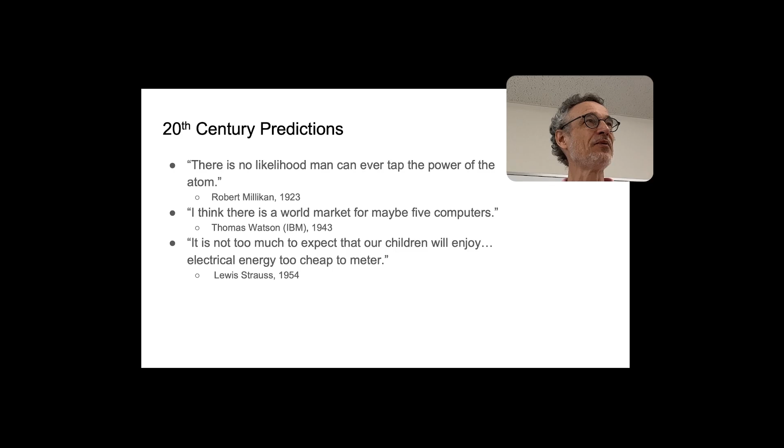So then into the 21st century, this is from 2000, 26 years ago, people were predicting this - the International Energy Agency, who are responsible for looking at international energy, and their predictions.

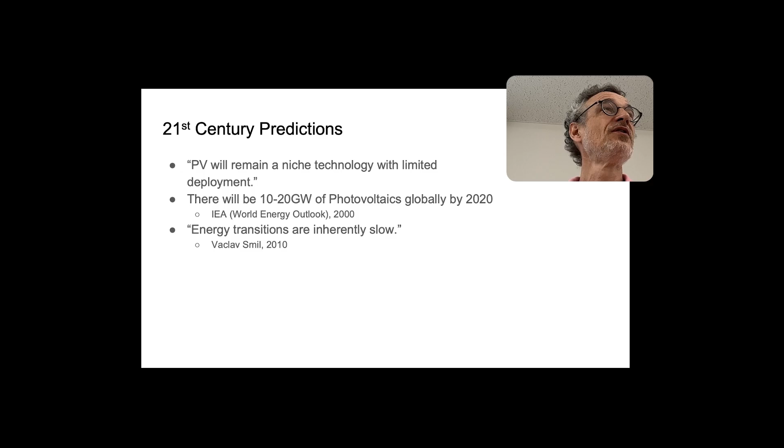They thought that photovoltaics would just be a niche industry, not widely used, and predicted 10 to 20 gigawatts by 2020. There's another more recent quote that energy transitions are inherently slow, which I'm not sure is true - I'm not sure what's slow, how slow is slow and how fast is fast.

Around half is in China. But China also has not half the population of the world - it probably has about half the manufacturing of the world, probably about half of industry is in China.

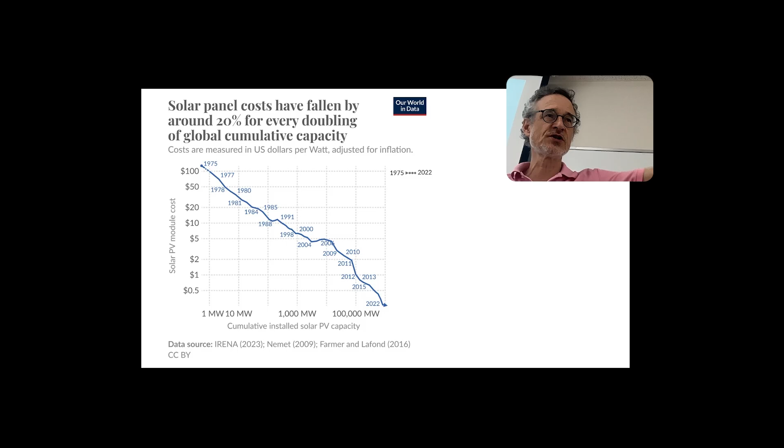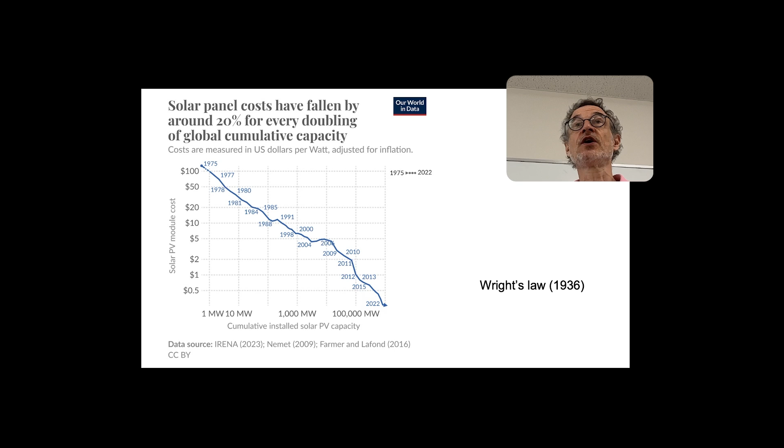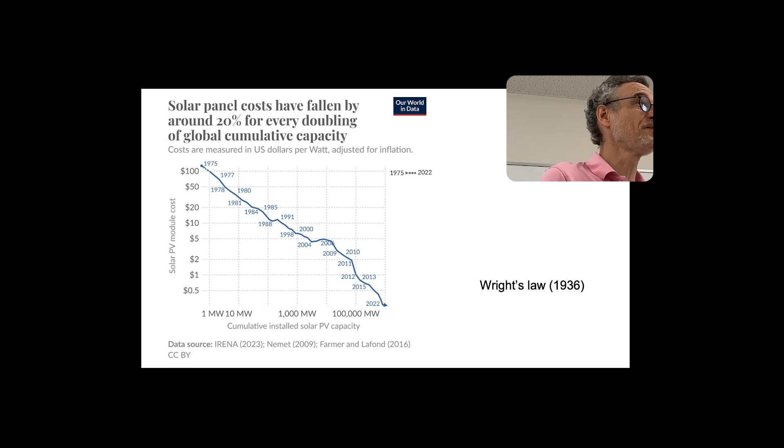The other thing that's happening is this cost. What's been happening at the same time as we're using more photovoltaics, the cost has been going down. There's a fairly steady relationship - as more solar panels are installed, the prices go down. This is called Wright's law, and I think this applies to many different kinds of technology - whether it's computers or solar panels or shirts or pencils, as they produce more, the costs go down, and it goes down in quite a predictable way.

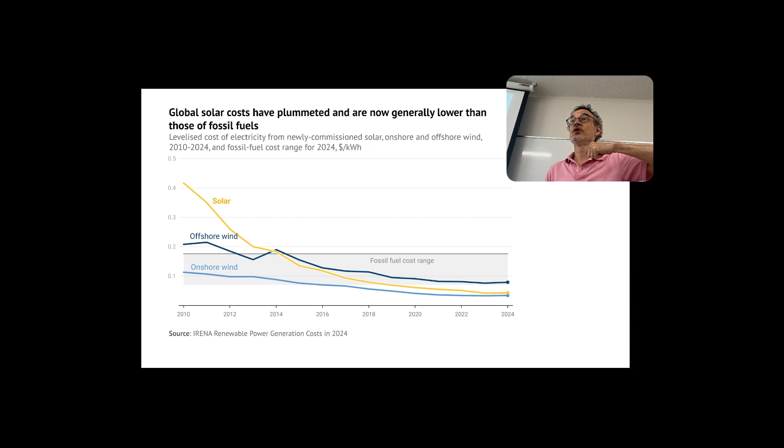What's also happened - this is the cost of solar and wind. There's two kinds of wind power: onshore wind and offshore wind. The advantage with onshore wind is it's close to where the electricity is used - you don't have to go out, the sea can be dangerous, the sea can be quite damaging. But the advantage of the sea is there's more wind, more constant wind, and you can build bigger wind turbines. But in most cases, onshore wind has been cheaper.

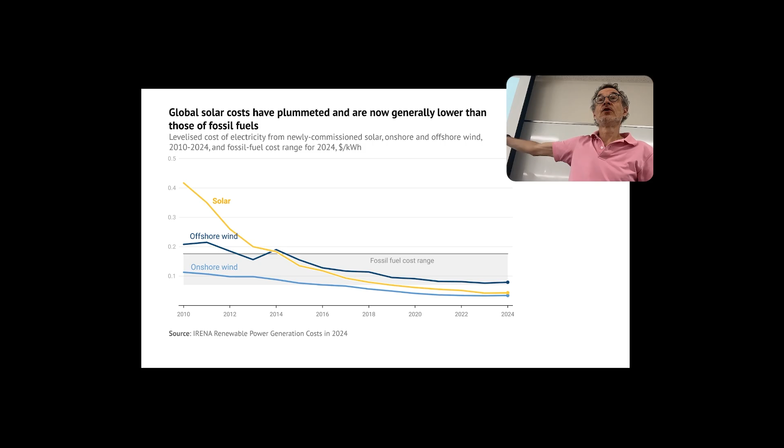This is the range of fossil fuels, which is more or less staying constant - fossil fuels is old technology, it's not really going to get cheaper. Wind and solar are getting cheaper, and now offshore wind is getting to be cheaper than most fossil fuels. Already, solar has been cheaper than fossil fuels, and onshore wind has been cheaper than fossil fuels for quite a long time. Of course, this depends where you are in the world - not everywhere is exactly the same.

The other thing that's happening is the return on investment in oil - the amount of energy you need to put in to extract oil, it's getting more expensive to find the oil. We've found all the easy oil; we need to dig deeper and go further to find more recent oil. Interestingly, some of the oil is underneath ice, so as the world gets warmer, it may become easier to find oil - which is what's making the world get warmer. I don't know whether that's irony.

What's happened as well - since the amount of solar power is increasing every year, we're using energy to make solar panels. For a while, we'd been using more energy to make solar panels than we were getting from them, because production kept increasing. But in the last maybe 10 years, this has flipped - now the amount of energy we're getting from solar power is greater, because manufacturing has got more efficient, cheaper, and uses fewer resources. So now the photovoltaics are a net benefit to the energy grid.

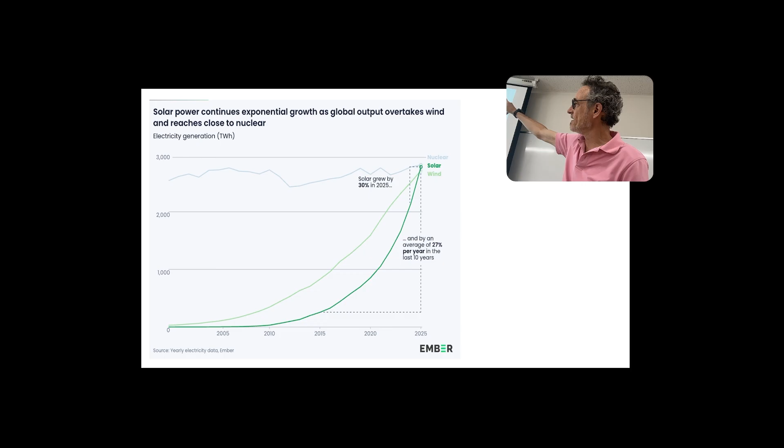This is around 2025. We're now at a very interesting point where we have nuclear, solar, and wind all at about the same level - they're all non-carbon or very low carbon. So as far as climate change, nuclear, solar, and wind are all good news. But we can see nuclear is fairly constant, wind is increasing fairly steadily, and solar is increasing very steeply.

And this is what's been happening in the past. So one thing we can see, there are curves. What tends to happen is technology develops on some kind of curve, and often what's called an S-curve. At the beginning it gradually increases quite slowly, then it starts increasing very quickly, and then it kind of tails off and levels. This is known as an S-curve.

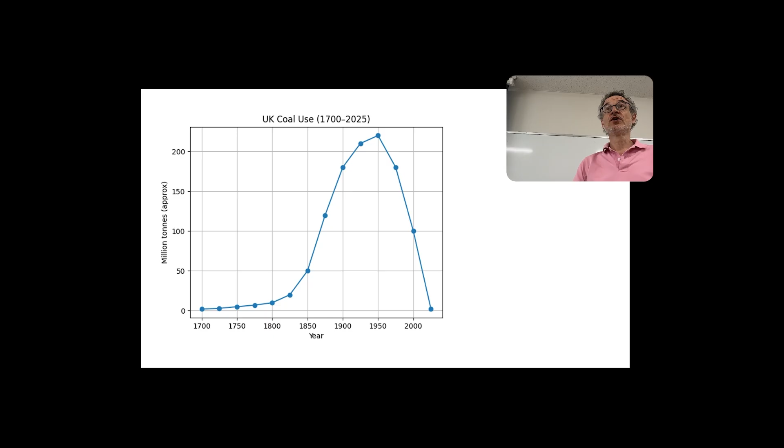So this is UK coal use. The UK was one of the first countries to harness coal for steam engines and for power, and also it's been one of the first countries to stop using coal. We can see that not only has this gone up in a kind of S curve, but it's also going down again later.

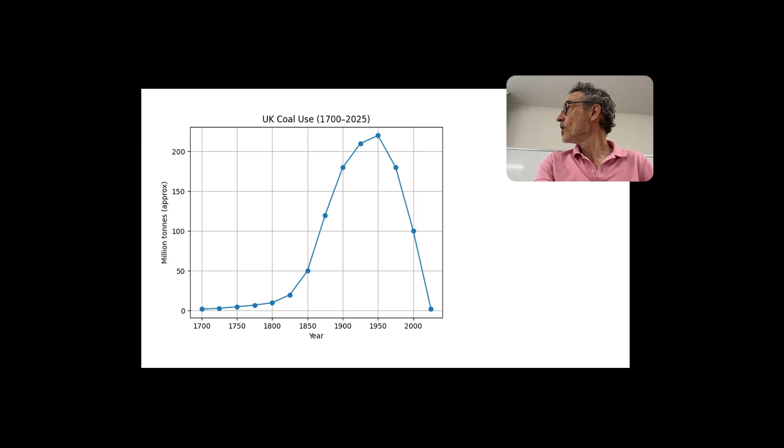So this is called a normal curve, where the first part is the S curve going up, and then with most technology, eventually we stop using - or so far we have stopped using - most technology. So technologies do have an end.

So thinking about the S curve, where do you think we are? Could you please discuss where do you think these are going in the future? What do you think will happen in the future to nuclear and solar and wind? Thinking about the S curve, please discuss. Open your crystal ball, put on your future glasses, and look into the future.

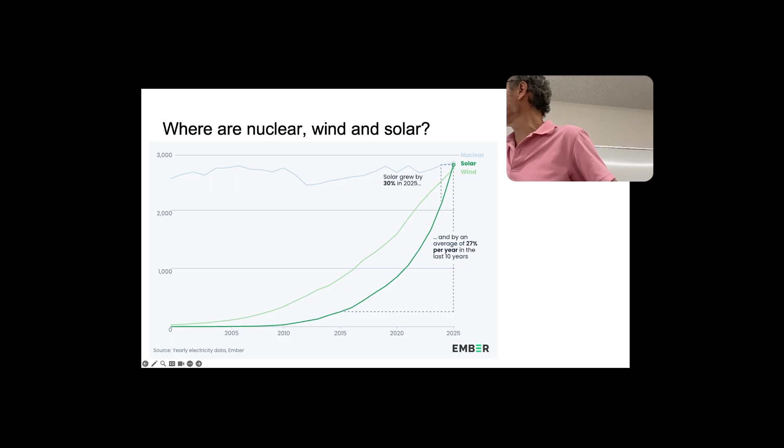Looking at the data, it looks like nuclear is quite stable - I'll talk a bit more about nuclear. This is the last 25 years. Nuclear has not gone up, but the trajectory, the direction they're going in - solar looks like it will go very high, and wind also looks like it's increasing and not going anywhere.

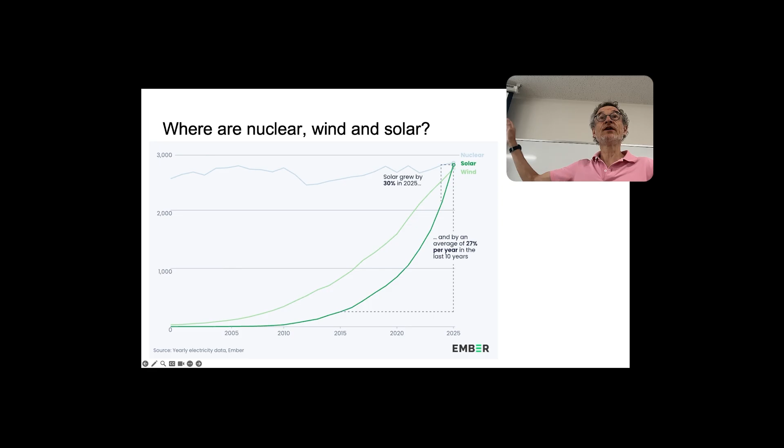So true or false? Governments always fund the best technologies. Nuclear power projects are usually over budget and late, and renewable energy can only happen with government subsidies. What do you think? Please discuss.

So what do you think? Governments always fund the best technologies - true or false? Nuclear power projects are usually over budget and late - true. Renewable energy can only happen with government subsidies - true or false? I think there are some things that will happen anyway.

Some things just make sense economically, and those things don't need government funding. There are some ideas that are so stupid that governments should not fund them. And I think ideally the governments will pick projects that will later become helpful and become economic, but right now are not economic. So there's a kind of sweet spot between impossible and, of course, we don't know - governments don't have crystal balls.

Governments can't see the future either. So I think sometimes governments will fund the wrong technology. But probably they should do, because I think governments should be thinking of the future, and they should be supporting technology that may become useful.

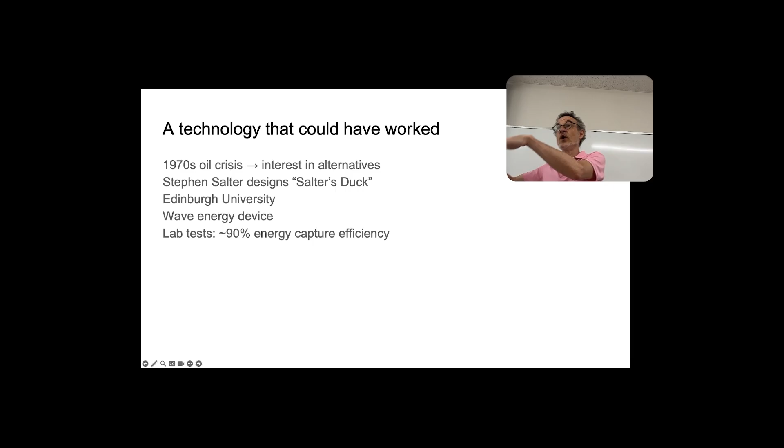He made a device for getting something like 90% of the energy from waves captured with these devices. Another advantage is that if you're taking power out of the waves, you have calmer water on the other side, so this could also be useful for protecting the seafront.

This did seem like a wonderful idea, and nothing happened. I think there's some research showing that what happened is they applied for money from the UK government, and there was what was known as the non-fossil fuel obligation — money set aside for non-carbon, non-fossil fuel energy generation.

However, most of the people in the non-fossil fuel obligation committee and panel that decided where the money was going were mostly nuclear scientists. And most of this money was going into nuclear, which of course is non-fossil fuel.

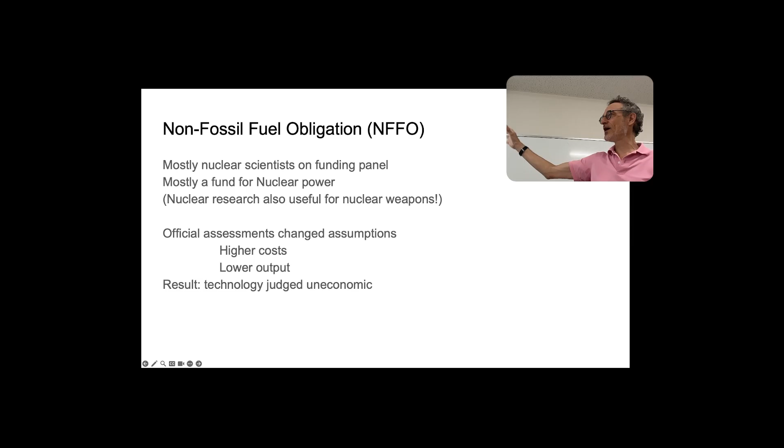By the way, nuclear power is also useful for nuclear weapons. The history of, for example, the Manhattan Project, probably the biggest technological development project in history, was a secret project that channeled lots of money into nuclear weapon development. So there's a definite link between nuclear power and nuclear weapons.

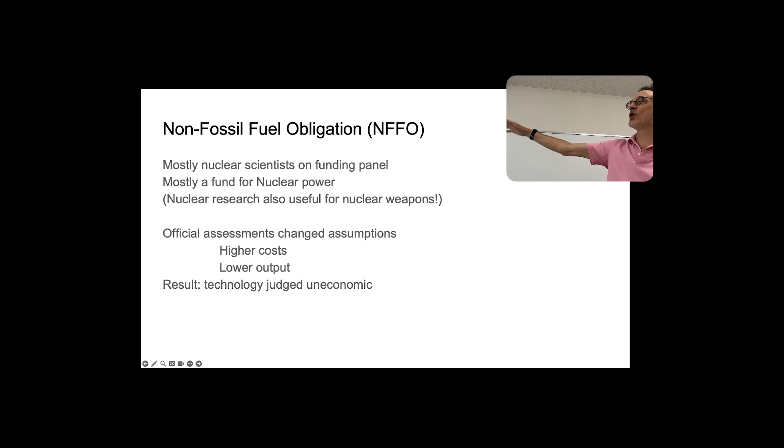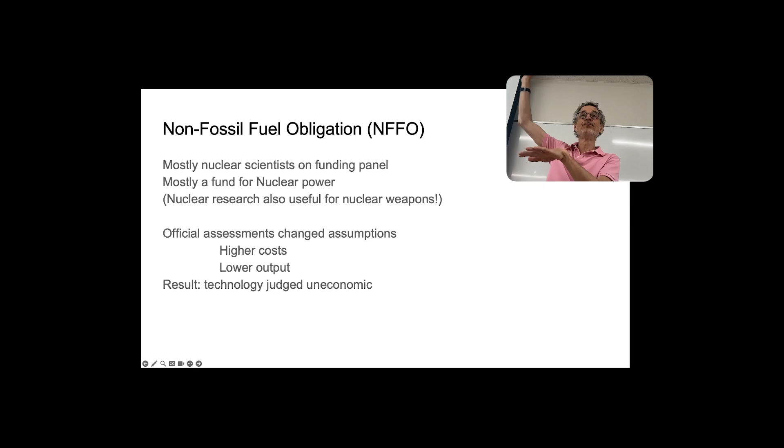So when they got the application for Salter's duck for wave energy, they changed the numbers to make it seem like the costs would be much more and the energy much less. So when they looked at the figures, it seemed like impossible research, and they didn't fund wave energy.

Nuclear power, meanwhile — most nuclear power projects cost more money than they should and take more time than they should, and this happens again and again. This is especially true, in fact true for most large-scale projects, for dams or for large sports arenas. Most large-scale civil engineering projects take more time and cost more money.

I think part of this is the bidding process. So if you're a government and you want someone to build a sports stadium, for example, you put out a bid and an invitation. Any company can tell you they're going to build your sports stadium, and you look at their bids on paper and choose the best one.

So if a company says they can make it cheaper, you'll choose that company. Often they cannot actually make it cheaper — when they were writing their application, they were being too generous. This is something that happens not just with nuclear, but especially within nuclear.

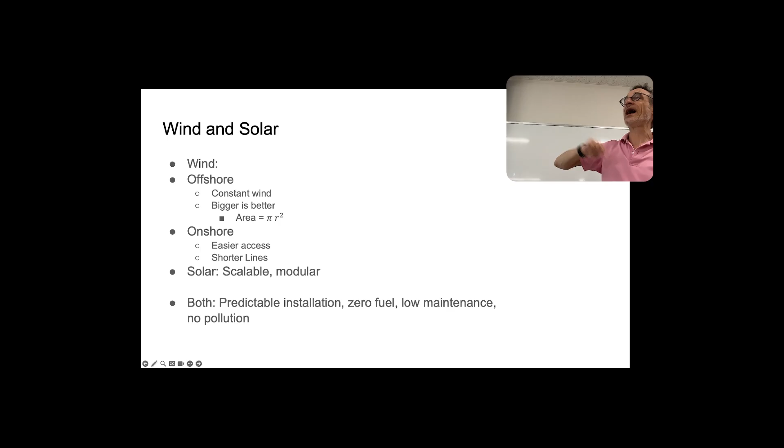In the case of onshore, access is easier. The electricity is nearer to where you want it. So both of them have good points.

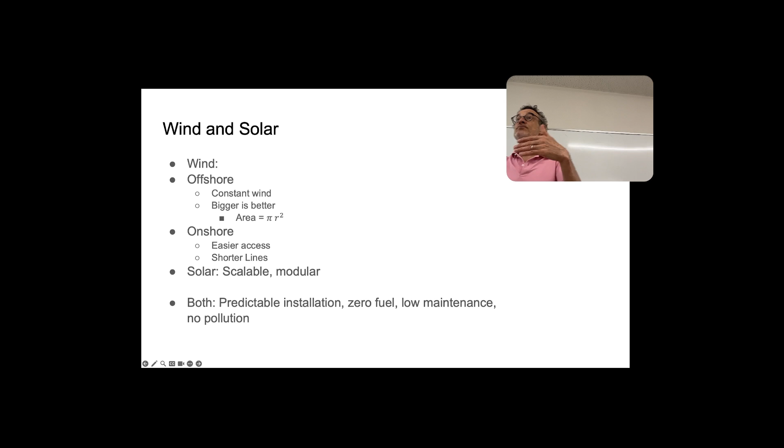In the case of solar, one big advantage is it's modular. So if you have a bit more space, you can add a few more panels, and whatever the size of your building or area, you can fit the solar panels wherever you want. So they're scalable and modular.

In both cases, the installation is fairly standard. There's no complicated systems needed like for nuclear power, and there's no fuel once you install the panels or the wind turbines, and there's very low maintenance, and of course no pollution. If it's solar or wind, there is no pollution.

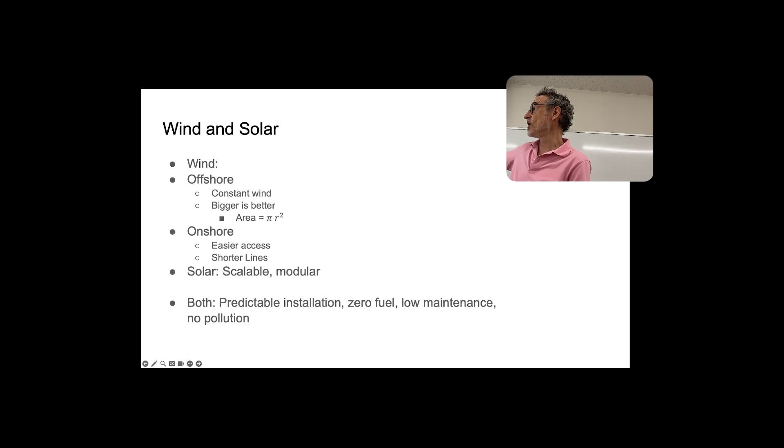Nuclear, of course, there's not no fuel, but relatively little fuel. There is no maintenance, and there should be no pollution. If nuclear power is running correctly, then there is no pollution. For example, France has a very good record for safe nuclear power. Many countries have a good record. Some countries do not.

I won't go into nuclear power, but I would like to talk a little bit about electric vehicles as another big use of electricity right now, another big use of power, and a big use of fossil fuels.

Do you drive? Yes? No? Okay, so if you drive, you may have noticed. I don't drive very much, so I don't care about the price of petrol. If you drive, then you may worry about the price of petrol. Recently, has it gone up?

So, true or false then? Electric vehicles catch fire. Electric vehicles don't work in cold climates. Electric vehicles are only as clean as the electricity grid. Mining lithium makes EVs worse than fossil fuels. And EVs produce more CO2 than petrol cars over their lifetime. What do you think? Please discuss.

True or false? Electric vehicles catch fire. True or false? Electric vehicles don't work in cold climates. True or false? Electric vehicles are only as clean as the electricity grid. True or false? Mining lithium makes electric vehicles worse than fossil fuels. True or false? Electric vehicles produce more carbon dioxide than petrol cars over their lifetime. True or false? False, yeah, just electric vehicles catch fire.

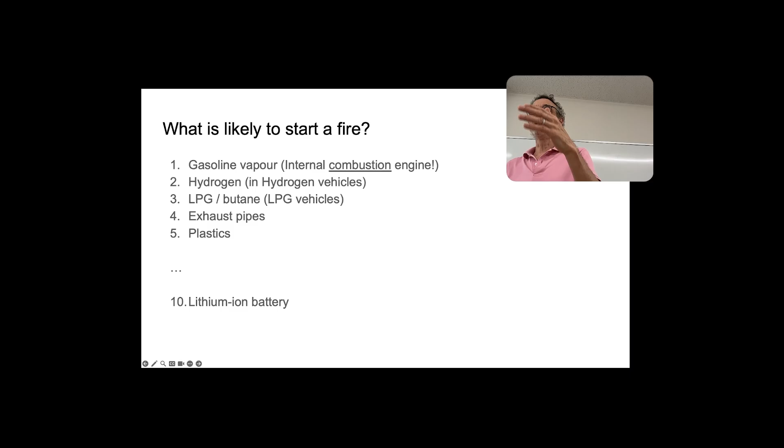One of my teaching colleagues told me this the other day, that electric vehicles catch fire. Which is, I think, really funny, because the internal combustion engine has an explosion, thousands of explosions every minute inside, and if you're using petrol, people are talking about using hydrogen instead.

Hydrogen catches fire. And sometimes there's LPG cars, LPG catches fire. The least, if you're worried about fire, then electric vehicles are much less dangerous. There's much less chance of catching fire.

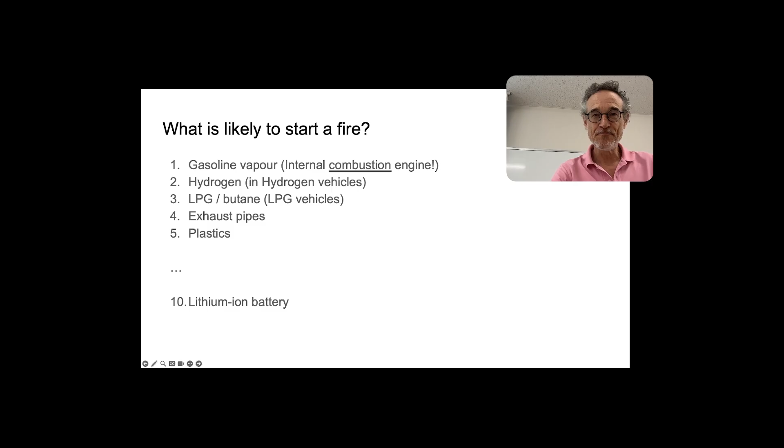I think this is partly... I think there have been electric vehicles that have caught fire. There have been batteries that have caught fire. I think it's not impossible.

And also, interestingly, I think there's a news bias against electric vehicles and in favour of petrol vehicles and fossil fuels. But there's also a news bias toward things that are new. A petrol car catching fire, that's not news. We've seen that in a movie loads of times. It's not going to get on the news.

But an electric vehicle catching fire, that's a new story. So that's news, that's something exciting. So there is a bias in news, and often what we see on the news probably is true, but we're not seeing trends. We're not seeing statistics. We're not seeing what's most likely or what's normally happening. The news is often showing what is unlikely and unusual, not what's normally happening.

In terms of mining, lithium mining can be damaging. Fossil fuel mining can also be damaging. I think a big difference is that once lithium is mined, it goes into batteries, and those batteries can be recycled. Once those batteries stop working, there's pretty much a 100% recycling rate possible with lithium batteries. Once fossil fuels are mined, we tend to burn them, and then we need to mine more. So there's a big difference between the two mining things.

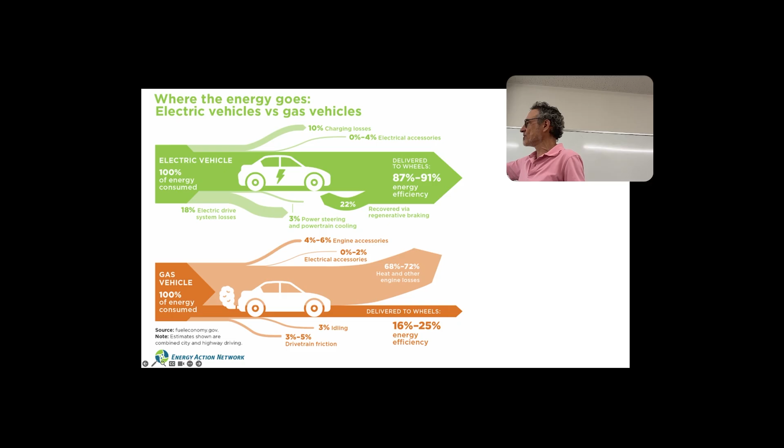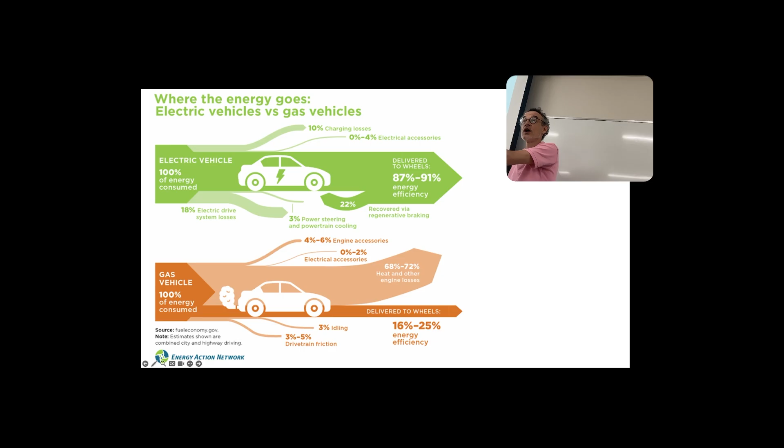Something like 16 to 25% of the energy of the petrol that you put into a car, at most a quarter goes into moving. Most of the energy you're putting in is going into heat and is being wasted. On the other hand, with an electric car, something like 90% of the energy that goes into the car goes into driving. For the equivalent of 1 litre of fuel, you can get something like 16 kilometres on a petrol vehicle.

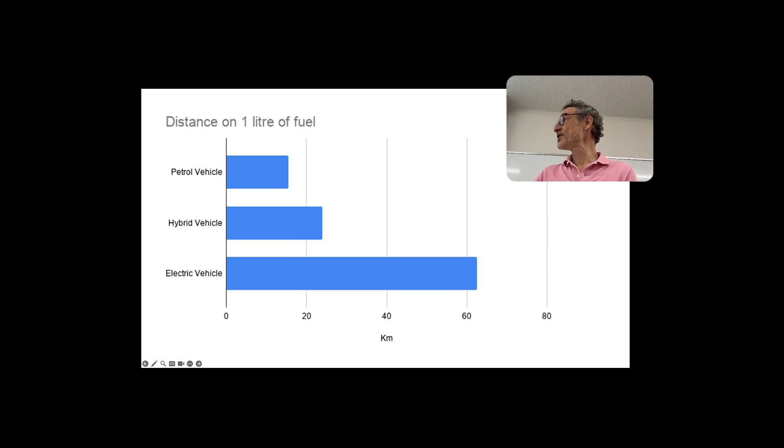Whereas with an electric vehicle, you can get over 60 kilometres. So to convert this into wine: if you're buying a bottle of wine, the petrol car is you buy a bottle of wine and you get to drink 1 glass. Whereas a hybrid, you get 1.5 glasses. And an electric vehicle, you're buying 1 bottle of wine, you get to drink 4 glasses. So electric vehicles, you're getting something like 4 times further for the amount of energy going in.

Interesting, the reason why hybrids are better than petrol engines is because they have a battery and an electric motor. So the reason hybrids are better is because they're moving towards an electric vehicle. When I first heard about hybrids, I thought they were a great idea because electricity is so efficient that it makes sense to use an electric motor and battery. It seems like an obvious thing to do.

Hybrids are a way of getting there in steps. You start with a petrol engine. If you put in an electric motor and a battery, you can get... one of the advantages with electric vehicles is when you put the brakes on, the movement is recovered and you charge your batteries. This is used in, I think, Formula One, they use regenerative braking. So a hybrid, once you have an electric motor and a battery, you can recover some of the energy, and use the petrol motor at more efficient revs.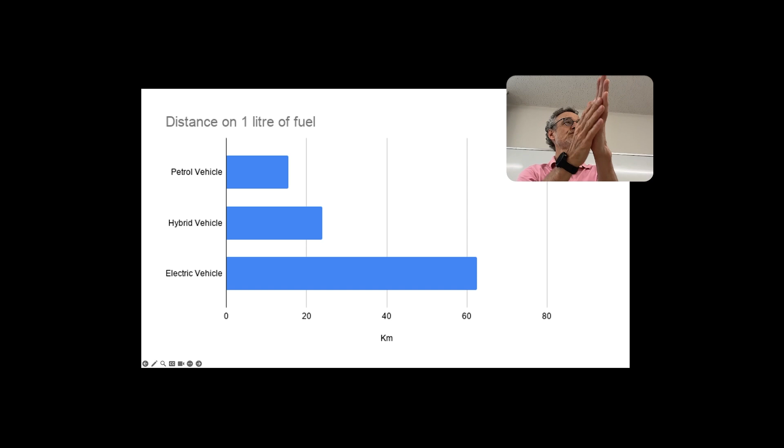This is looking at what's going into the car, but of course the energy needs to get to the car, so we have to look at the process. This is called well to wheel. In the case of petrol, the oil needs to be dug out of the ground somewhere, transported, processed and refined, then taken to the gasoline station. In the case of electric vehicles, you need to produce the electricity and get it to the car, to where the car is charged. So looking at the whole life cycle, it's more complicated.

And again, this may be very different depending on what electricity you have. If you're in a country that has lots of renewable energy and switch to electric vehicles, then it will be very clean. If you're in a country that has lots of coal, then it will be less clean. So there's a difference.

Some of them - Norway has a very high rate of electric vehicles. I think most of the cars being sold, over 90%, are electric vehicles. And Norway is a very cold country, so if you think electric vehicles don't work in cold countries, they do. One thing when it's cold, and this also applies to petrol engines, if it's colder and you're using heating, you're using more electricity. Same in summer, if you switch on air conditioning, you'll use more fuel. One thing with petrol vehicles, because they produce so much heat, you're driving around in a heater.

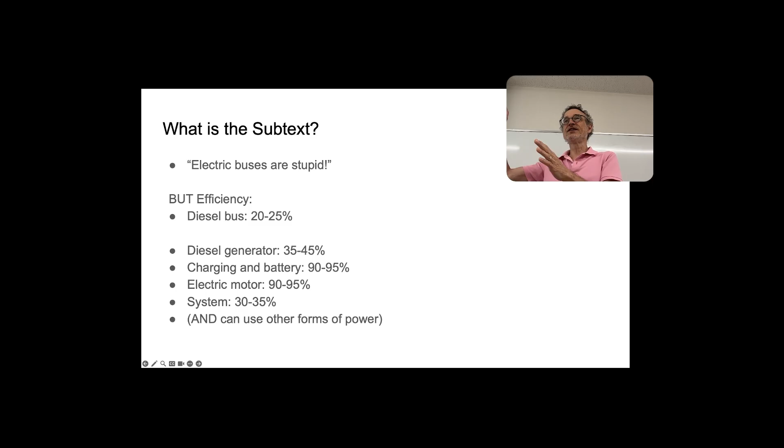But if we look a bit closer, because diesel buses are not very efficient, electric buses are much more efficient. Even if you use electric buses and use a diesel generator to charge them, you're using less diesel than a conventional bus. So the story - and also, you could use solar power, wind power, or if the nuclear power station is ready, you could use nuclear power.

So the story is not, look at these stupid electric buses. The story should be, you can even use diesel for these electric buses and it will be cheaper - or you could use wind, or something else. But the story does not mention this. The story is just saying, oh, they're using diesel generators, the city is useless, the bus company is no good. So it's kind of missing the story.

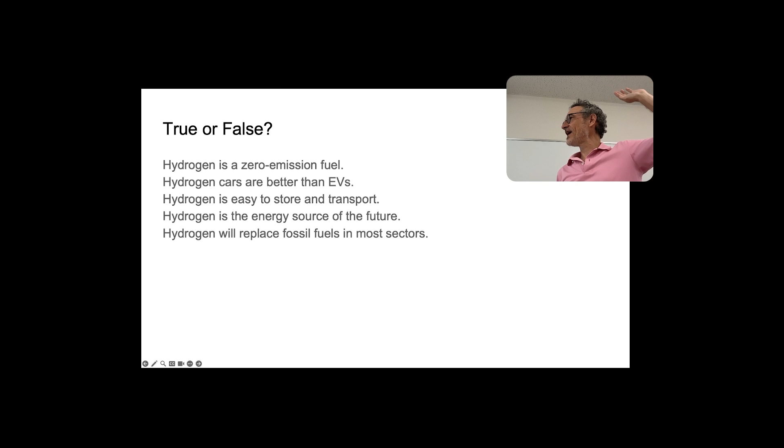Hydrogen - what about hydrogen then? Hydrogen is a zero-emission fuel. Hydrogen cars are better than EVs. Hydrogen is easy to store and transport. Hydrogen is the energy source of the future. Hydrogen will replace fossil fuels in most sectors. What do you think - true or false? Please discuss. Yeah, I think these are all false.

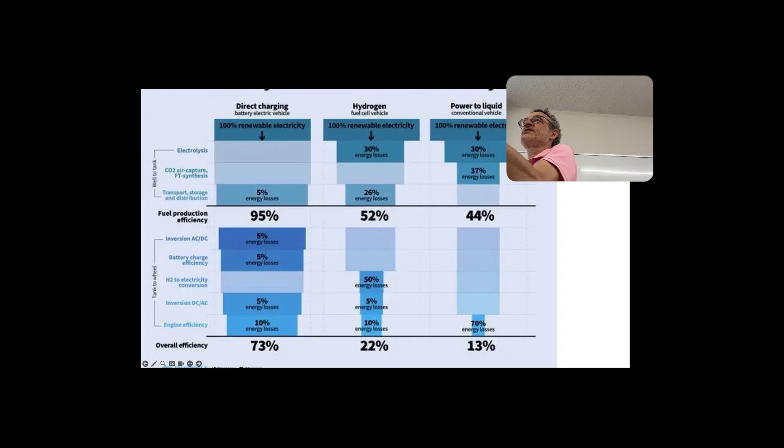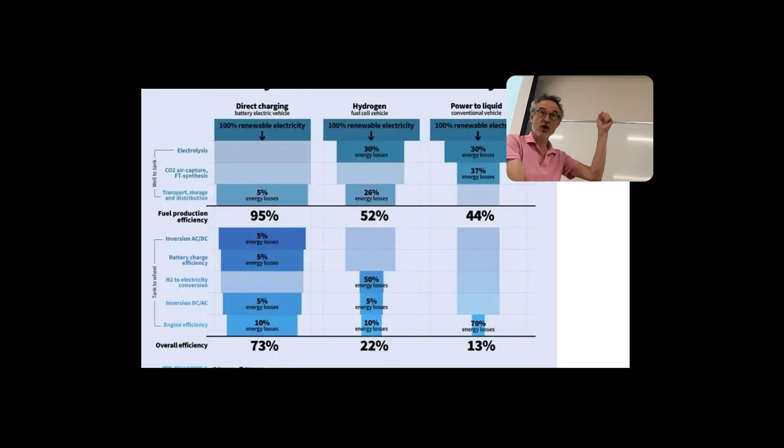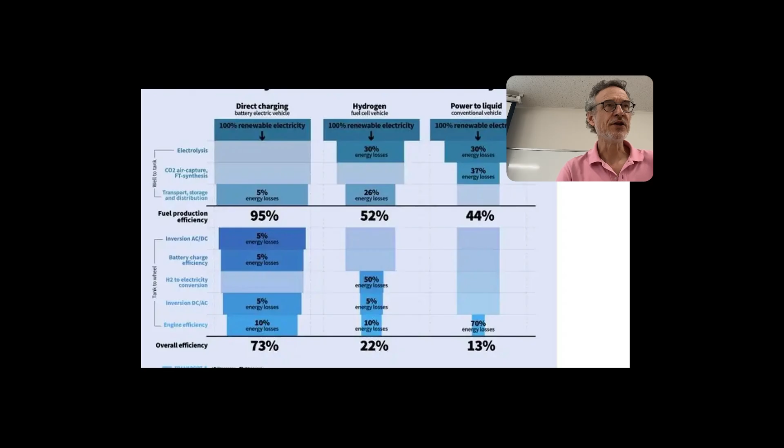If you look at the basics: for the whole system, if you have an electric vehicle, about 73% of the electricity gets into the driving. If you're using hydrogen with a fuel cell, then it's only about 22%. So electric vehicles are about 3 times better. Storage and transportation are also very difficult - hydrogen is very small, and you need very high pressure. It's very dangerous.

What is hydrogen good for? I think it's good for some industrial processes - if we want to make steel without carbon, hydrogen will be very useful. If you want to make ammonia, which is used for fertilizer for growing food, hydrogen may be very, very useful for that. So hydrogen does have some uses. In some cases it may be good for storage, but it needs to be a very special situation.

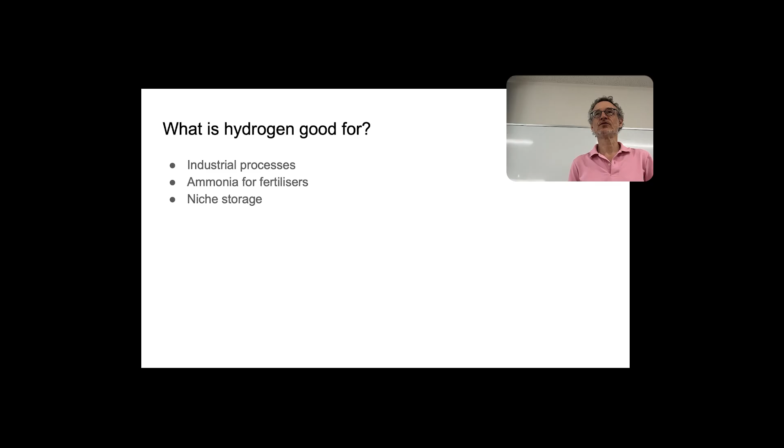I think for driving cars, it's a very, very bad option. For heating houses, it's a very bad option too, I think. Who benefits from hydrogen? Well, the fossil fuel industry - most hydrogen now is made from natural gas, so they're very happy if we use hydrogen because they can keep selling gas.

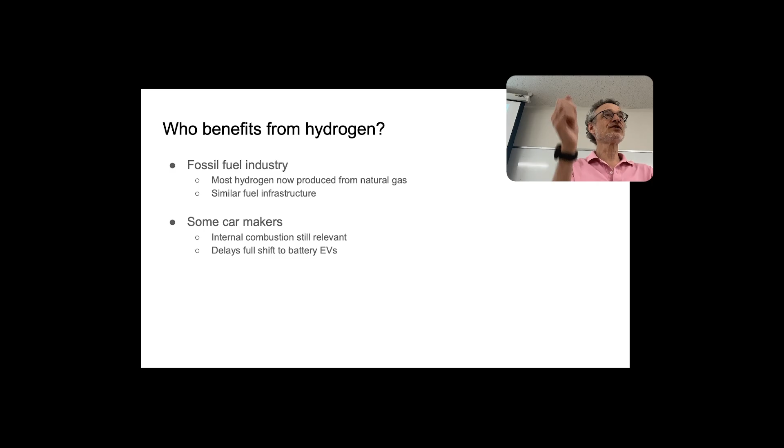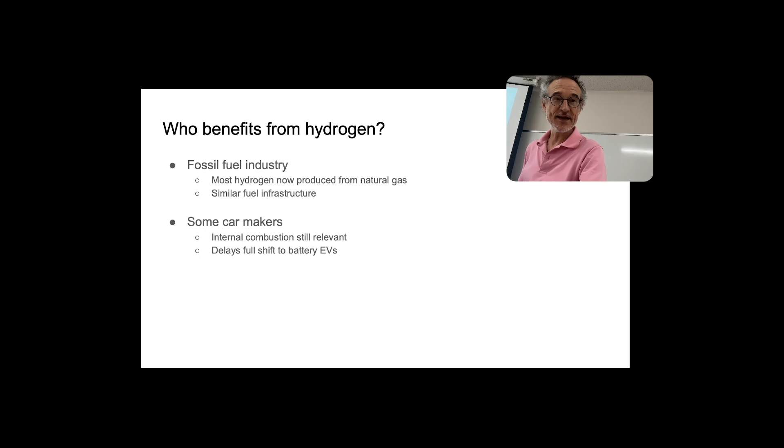The idea of hydrogen fuel cells has been around for 30 years. I think it's very helpful if you're making cars and you like making petrol cars, if you say, oh well, we will change to hydrogen fuel cells when they're ready - we're just waiting for fuel cells to be ready. Hydrogen has been the future fuel for 30 years, and it's always about 5 years in the future, and probably it will always be 5 years in the future. So hydrogen fuel cells are great for Mr. Toyota, so he can keep making his toys.

But I don't think they're very useful. So from the documentary, they looked at different possible reasons why General Motors stopped making the electric vehicle.

They found that the batteries were not perfect, but if they'd carried on developing batteries, the batteries weren't a critical problem with the technology. The consumers were partly guilty - I'll talk a bit about that maybe later. The California government was also partly guilty. Their main suspects were General Motors.

General Motors had a problem where they wanted to keep making petrol engines, internal combustion engines. And they were thinking of selling electric vehicles. But to sell electric vehicles, they need to tell people these are better than our petrol vehicles, so they'd be fighting against themselves. So I think they were very reluctant to do this.

Interestingly, Tesla, I think, has been the big driving force behind electric vehicles, and they only make electric vehicles. So Tesla don't have to worry about saying that electric vehicles are better than petrol vehicles.

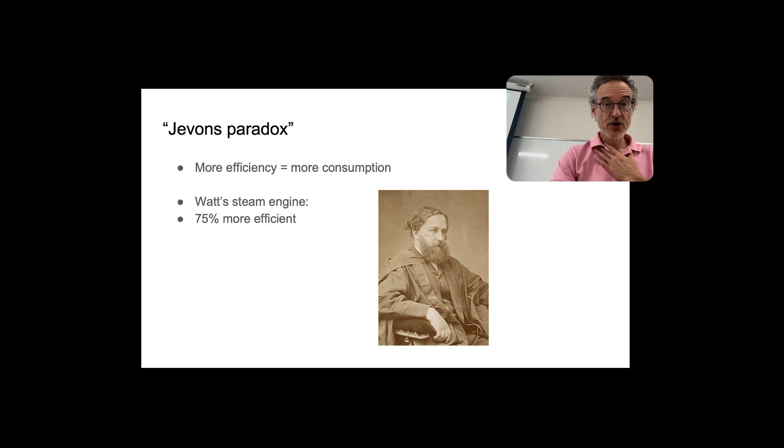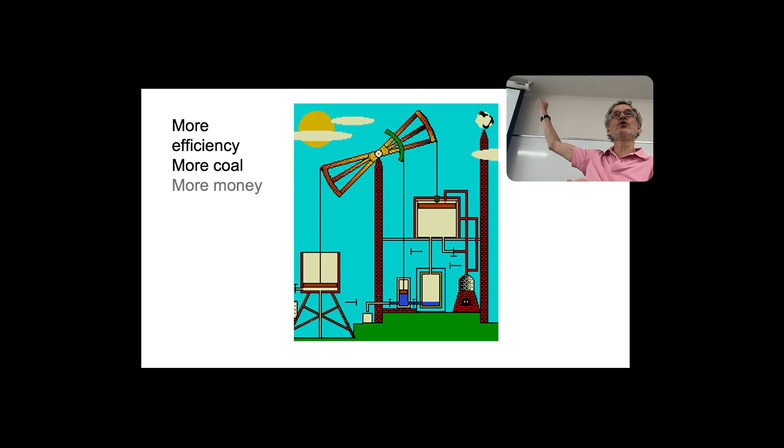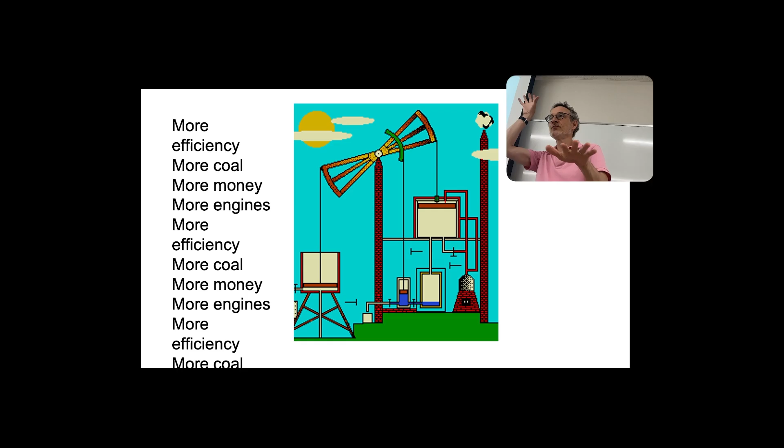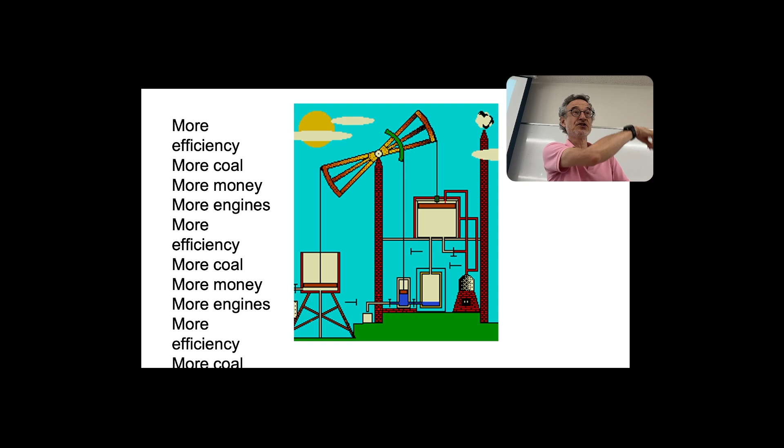Basically what they're doing is pumping. So the first steam engines were used at the coal mine to pump water out of the coal mine, which means you can dig more coal, which means you can pump more water, and dig more coal. Then you can put a steam engine on the railway so you can send the coal further, and then to the ports, and then make ships and put a steam engine in the ship and start shipping coal. So as you get more efficient, you can use your engine in more different places.

Let me give you a real-world example of the Jevons paradox. Let's think about taxis. Right now, if you imagine you have a taxi company, you need to run your taxis, get fuel, a driver, and others - insurance, vehicle costs, background costs - and it may cost something like 80 to 140 yen per kilometer running a taxi company.

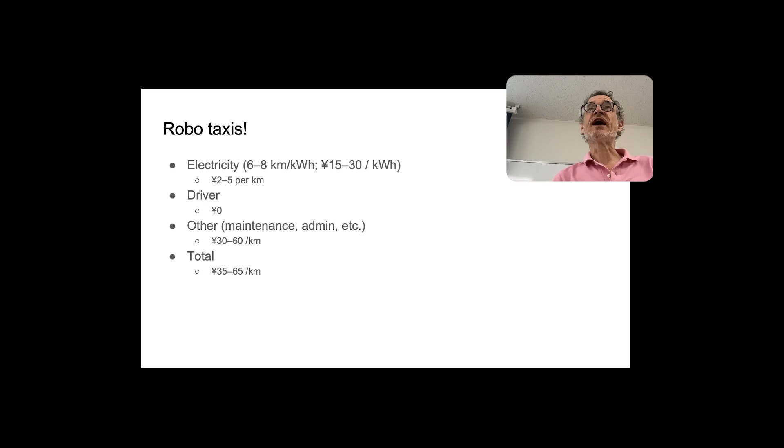Now, robo-taxis are coming, I think. And if you have a self-driving electric vehicle, then the electricity will be 4 times cheaper - you're switching to electric rather than fuel. You don't need a driver, so your taxis will become much cheaper, maybe half the price.

So if you can reduce your costs as a taxi driver by 50%, this means you can reduce your taxi prices to half. And if you reduce your taxi prices - maybe it costs about 1,000 yen for me to get from Matsumoto city centre to my house by taxi, that's too expensive, I'm not going to pay 1,000 yen. If it was 500 yen, I may get a taxi. So if the prices go down, suddenly we get much more people, much more taxi drivers.

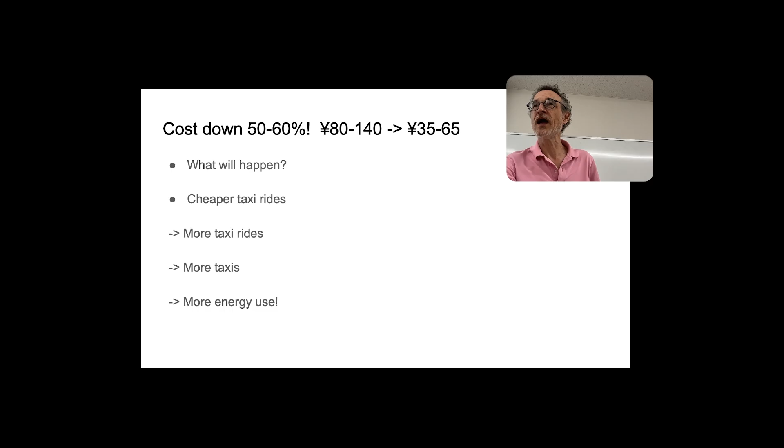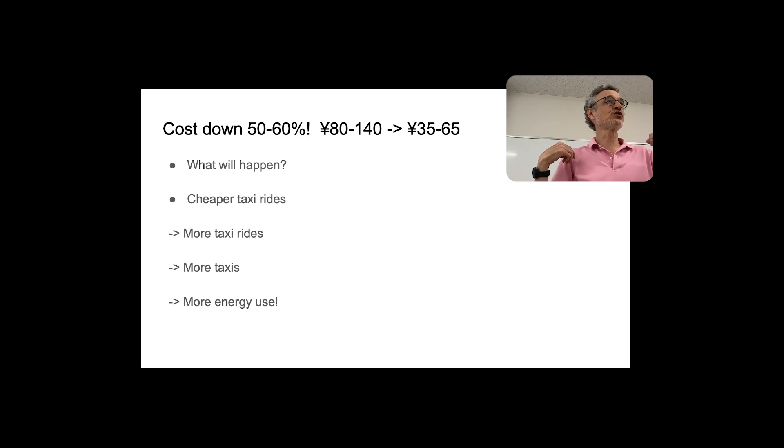So this is an example - I think probably this will happen. I'm not sure when, but I think probably we will have electric robo-taxis, and it will be good because we don't have to drive and can get around much cheaper. I think as we all get older - I'm a bad driver now already, I'm a dangerous driver. So when I get older, I'll be much more dangerous. I probably shouldn't be driving now.

This is a picture I may have shown before. This is my friend's camping equipment shop, and it's another demonstration of efficiency.

This is an LED with a candle inside. The candle burns and makes heat, and that heat runs a thermocouple, which turns heat into electricity, and the electricity runs the LED.

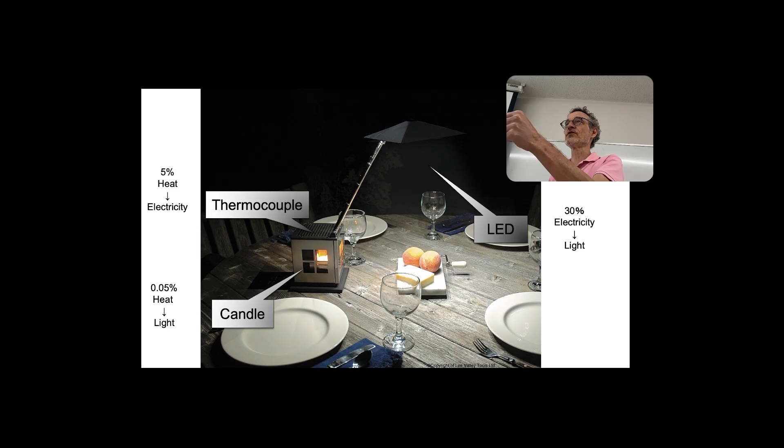LED light is about 30% efficient, which doesn't sound great, but compared to a candle, which is 0.05% efficient, a candle is incredibly inefficient for light. The heat coming from that thermocouple is 5% efficient, also not very efficient. But the amount of light you get from the LED is much more than the light from the candle.

This is the price of lighting, from a study in the UK. Over the 20th century, the price of lighting went down, and at the same time the amount of lighting used has gone up.

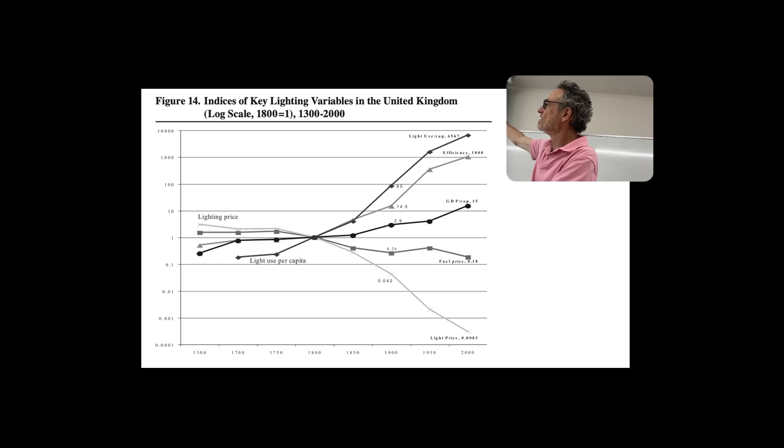This shows the efficiency has gone up something like 1,000 times, but the amount of lighting used has gone up maybe 6,000 or 7,000 times. So the amount of lighting used is going up more than the efficiency is going up.

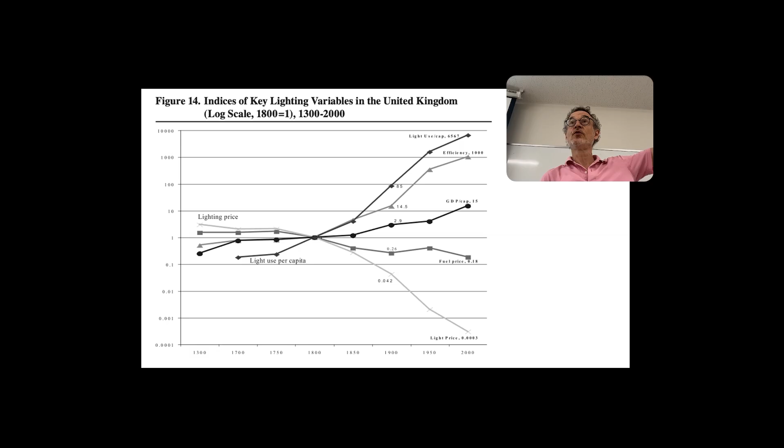Cars have become more efficient, but as cars get more efficient, people just buy bigger cars. This is data from the US - in the 70s under Carter, during the oil shock, people started getting more efficient cars, and there was a real increase in efficiency.

This is the actual efficiency of cars on the road. Then under Reagan, efficiency went down, so cars became less efficient until about 2005, when efficiency started going up again.

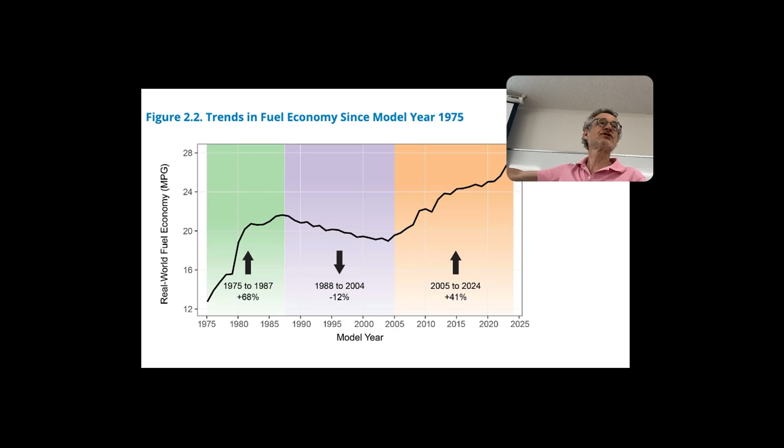I think one factor was a tax break - if you bought a car for your business you could get tax back on it. So instead of buying a regular car, lots of people would buy an SUV and say 'this is for my work,' and effectively the US government was subsidizing SUVs, paying people money to buy bigger cars.

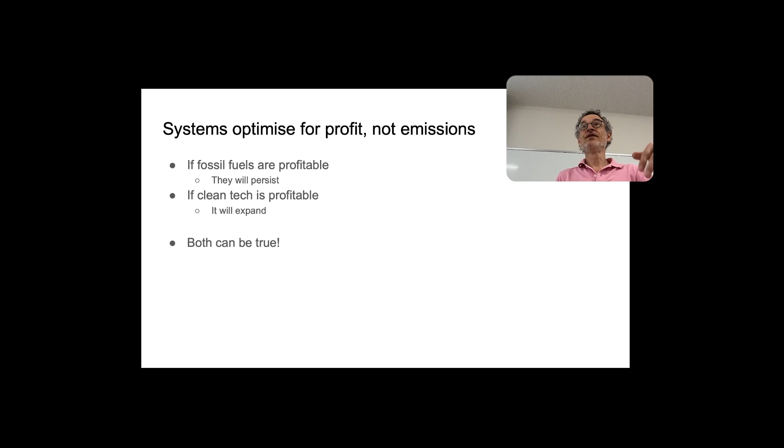Now, I think this is not a choice - both of these things can be true. Just because renewable energy is cheap, that doesn't mean people will stop using fossil fuel energy. They can stop using it, but it's not necessary, it's not inevitable.

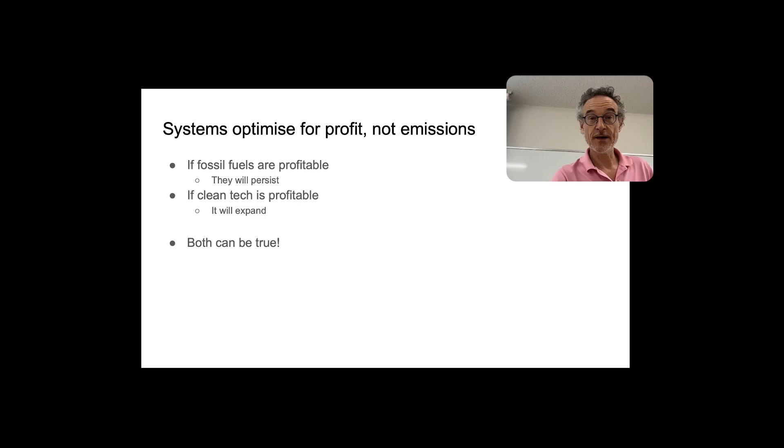So what will happen? Clean technologies will reduce global emissions - this is not necessarily true. Hopefully they can help, innovation is fast enough to meet climate change. Innovation is moving quickly, but also emissions are moving quickly. Everything that's going into the atmosphere is staying there. I don't know if the innovation is fast enough.

Markets will solve climate change - I don't think so, unless the markets are pushed to support climate change. Governments support renewable energy more than fossil fuels? No - governments support fossil fuels. Right now, governments are paying more money into fossil fuels than they are into renewable energy. The markets, on the other hand, are investing more into renewable energy.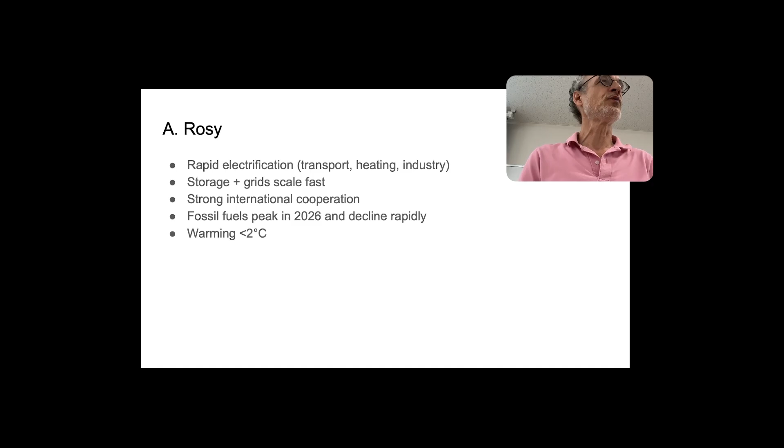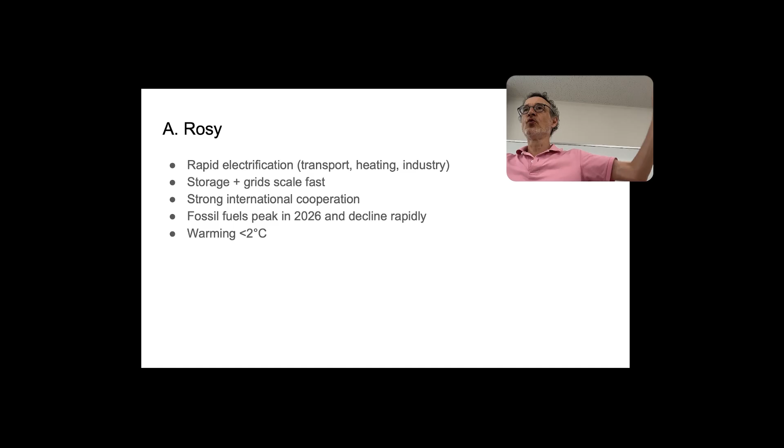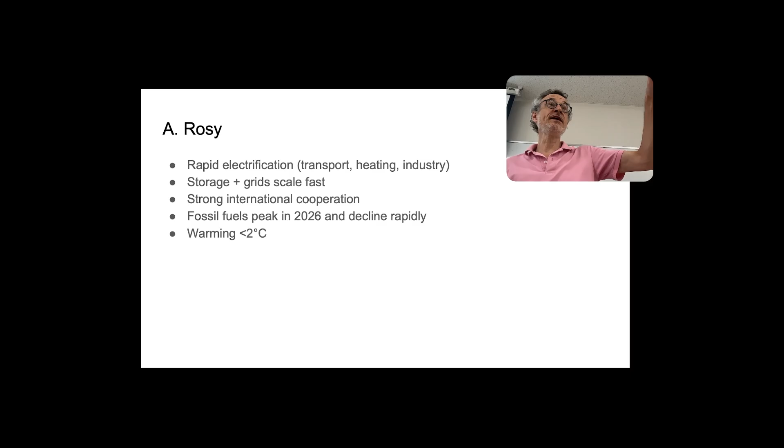So I've been thinking about the future. I can think of 4 different futures. The first one, this is my favourite one - the rosy future, that very quickly we electrify transport, heating, industry. Everything goes to electricity, it becomes more efficient. We get more solar, more wind, storage, and the grids scale quickly, and there's cooperation between different countries. Fossil fuels peak this year, and then we start to have less and less fossil fuels from 2026. This means warming will stay below 2 degrees - it will get warmer than now, but not much warmer. This is the rosy future.

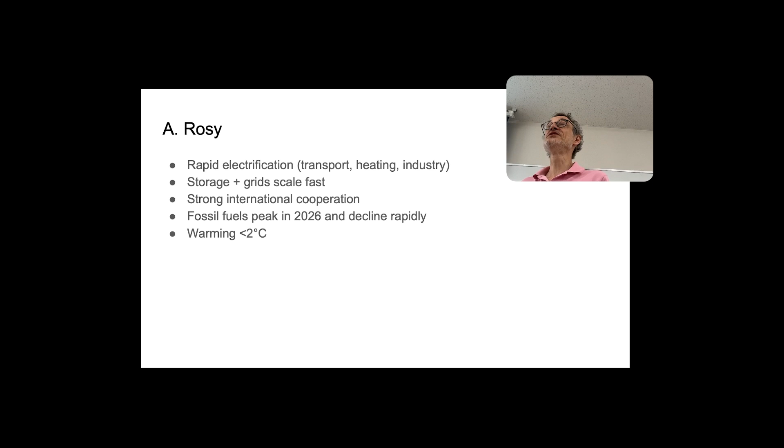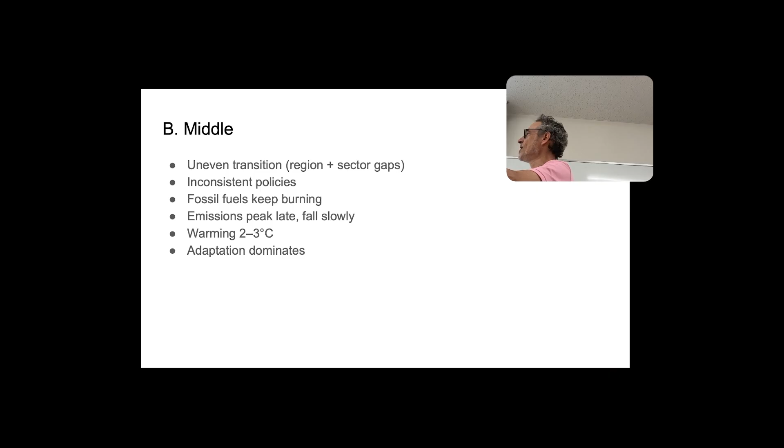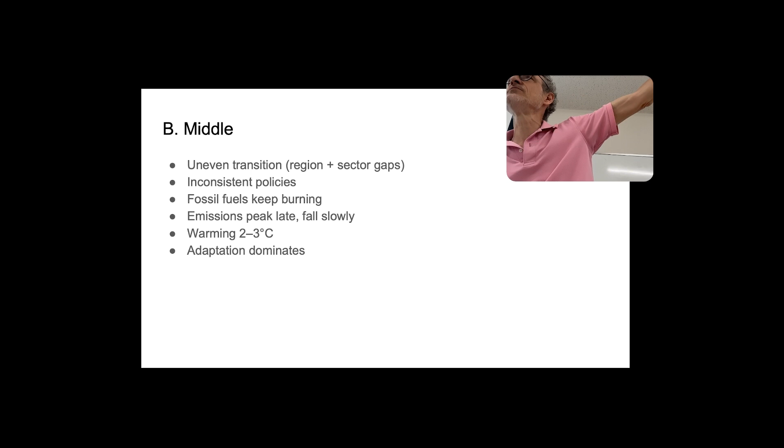The middle future is that the transition will happen, but not evenly. So some places - Norway, maybe Nepal - some places will transition quickly. Other places will transition slowly. The policies will be inconsistent, different policies in different places. The fossil fuel industry will continue to sell fossil fuels. There will be a peak, but not for another 10, 20 years, and then the fall may be quite slow. So we'll get maybe 2 or 3 degrees of warming, and that means adaptation - that means we're going to need to change where we live and how we live.

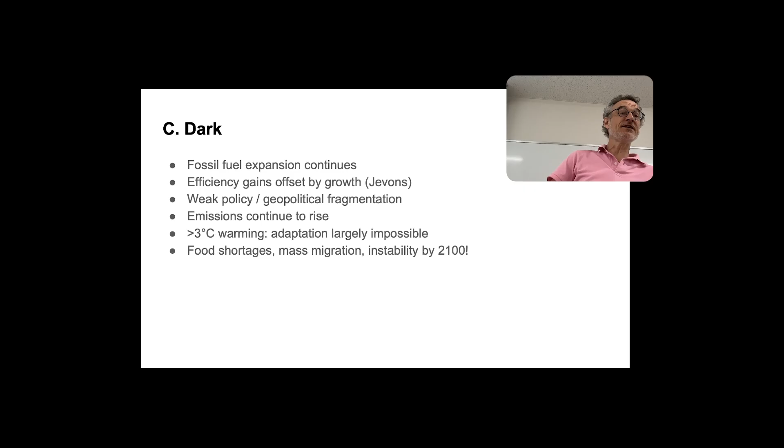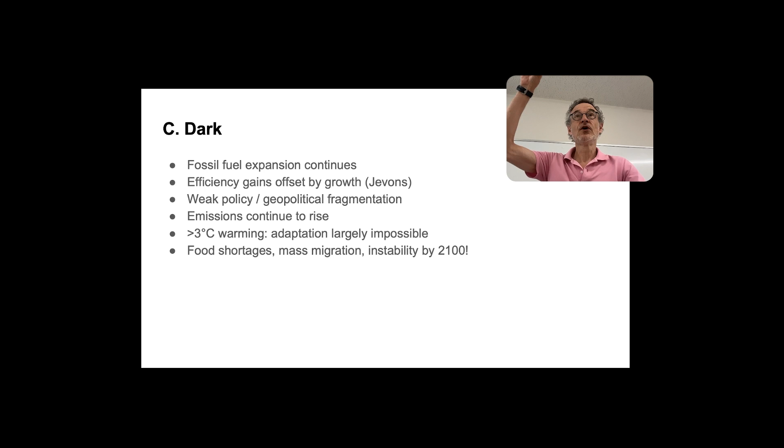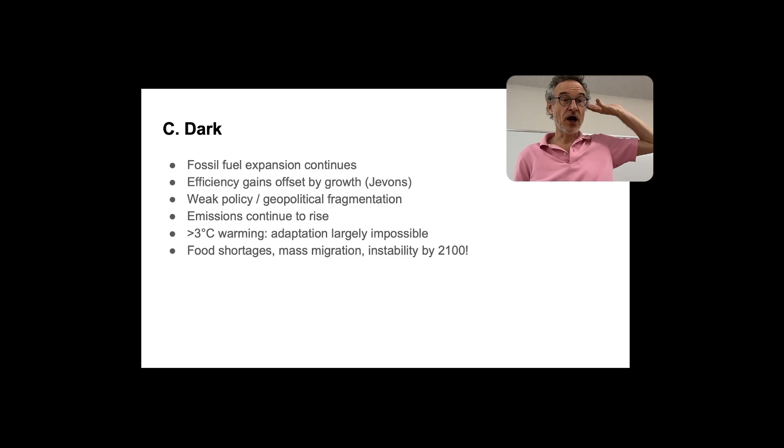Next is the dark future, in which fossil fuels continue to expand. We continue to get more fossil fuels. We do get more efficiency, but thanks to Jevons, that just means we use more, so consumption goes up. The policies are weak, geopolitics is fragmented, there's no cooperation across countries. Emissions keep going up, and we get more than 3 degrees of warming, which means some places we cannot adapt. So this is not very good.

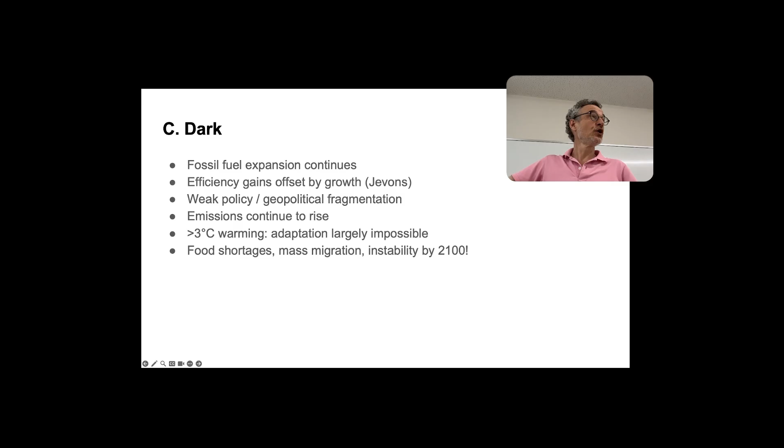There'll be food shortages, mass migrations, lots of instability. I don't know if we'll still be here in 2100. Maybe we won't be here.

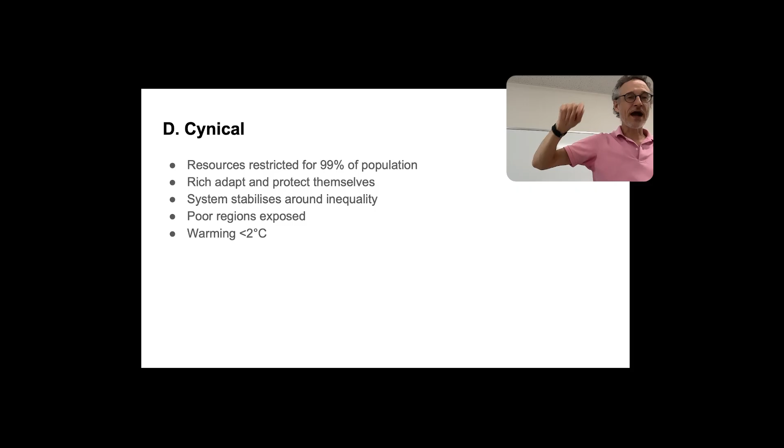The next one is a cynical view of what may happen: that resources will be restricted for 99% of the population. Most people will not be allowed to use lots of energy or resources. The rich will adapt and look after themselves. The system will stabilize around inequality, so we'll have a system where 1% can do what they like and 99% stay poor. This could keep warming below 2 degrees, so it's a solution for the climate problem. I don't think it's a particularly good solution, but this could also happen.

What do you think? What do you think is going to happen? Which of these options? Time is running out. Do you have any questions? Please discuss any questions, any predictions. I'll give you a couple of minutes to talk to each other, and then see what you have to say.

And what do you think about data center energy concentrations? I don't think it's a very big problem. I think it's a relatively small problem, compared to, for example, aeroplanes, or heating, or cars, or steel, or concrete. I think again this is news, it's a news story, and data centers do need energy. I think they will—they're saying we need all this energy, we need lots of energy. But I think they don't need as much as they say, because of efficiency.